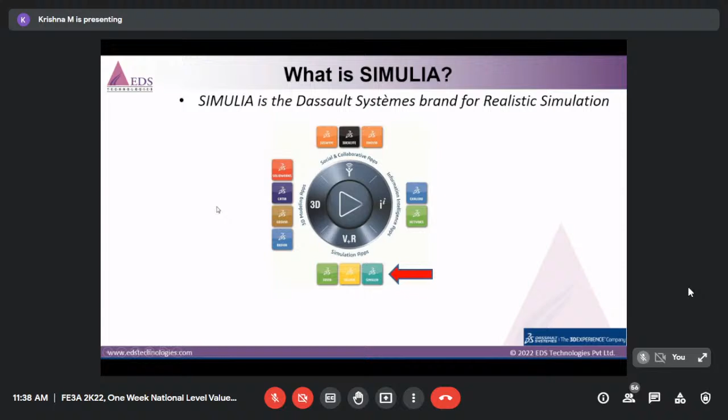So here you can see what is realistic simulation, right? If you can see, what is realistic simulation? What do you mean by realistic simulation? Okay, realistic simulation is a simulation that helps be physical, realistic, and lifelike in every way. So what does that mean?

So how can I improve my - what is realistic simulation? Tell me.

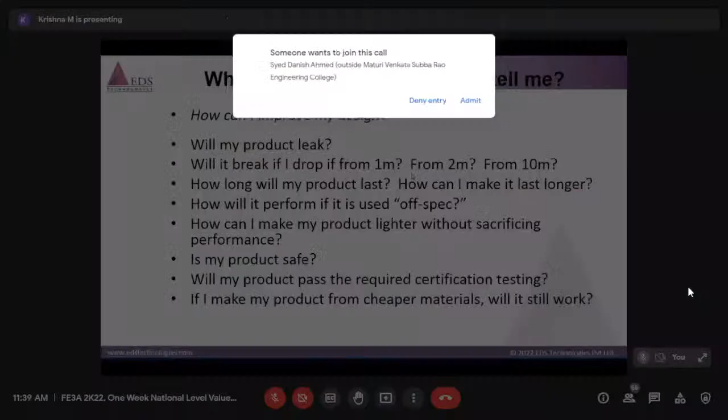Simulation helps you improve product design and development. It can be used at various stages, not only during product development but even after. For most OEMs, issues can arise after delivering the product, like breakage of parts that need to be quickly rectified, and at that stage you cannot go to the lab and keep testing. You need a solution faster.

For that process, you can use ABAQUS or similar finite element packages. You can't just go and do prototyping at each and every part in the design process, as it would take a long time. To reduce the time, you use a simulation technique, a simulation product.

You can do various analyses, like a drop test, for industrial products ranging from washing machines to mobile phones. These products undergo various testing before release into the market, but most companies no longer do all the tests physically. Instead, these are done using simulations, doing finite element analysis to reduce the time.

If you do physical prototyping and testing for everything, it takes a lot of cost, and you have to do multiple testings. The cost and the amount of time required both increase. To reduce this timing, we use realistic simulation.

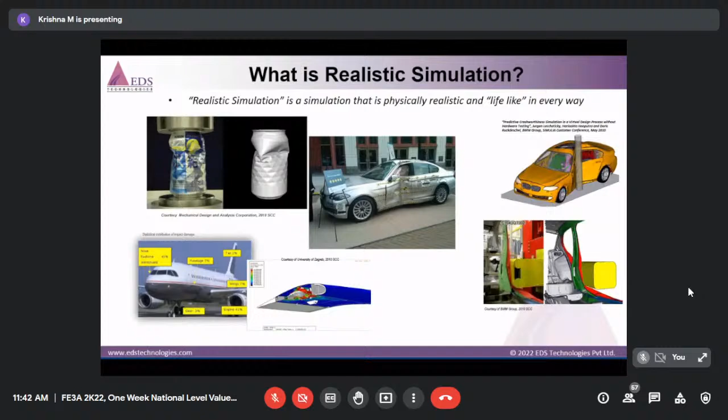Our product portfolio addresses the need for this, covering product development across the life cycle, from concept to detailed design, and realistic simulation of complex physics.

What industries use realistic simulations? All of them, starting from automotive engineering. In automotive, it's used for safety design, NVH, durability, powertrain, chassis, suspension, tires, and handling. In aerospace, it's used for composite analysis, thermal fluid analysis, and impact analysis.

In the ship industry, it's used for structure analysis, stiffness, wave slam, and blast analysis. In heavy machinery like excavators and tractors, durability testing of these products and various turbines can all be done with simulation.

Even for everyday products like smartphones and telecom equipment, electromagnetic analysis is done to see antenna coverage, where CST simulations can be done using SIMULIA products.

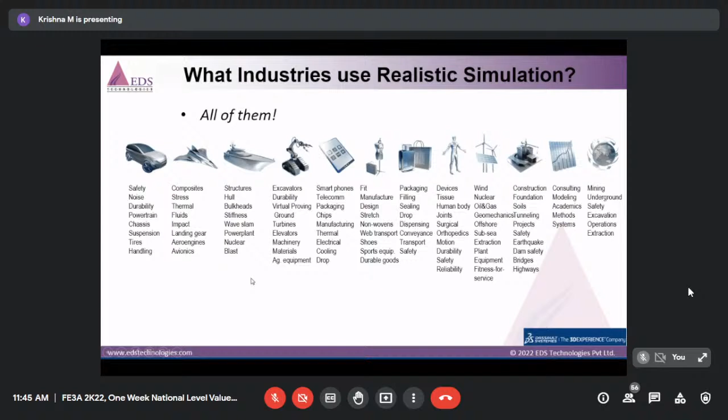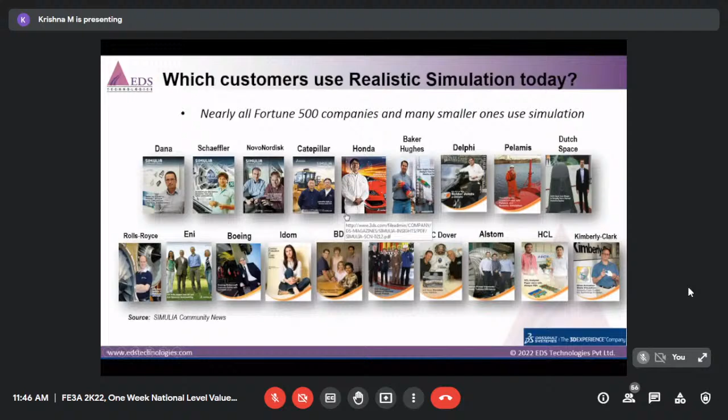So there are two aspects in this product supplied by SIMULIA: one is for commercial and one is for academic. For commercial purpose, it is completely useful starting from the design stage, where designers can use CAD, your products and PLM services to design the product, then a design engineer can perform simulations, and researchers can use it with full-fledged node count.

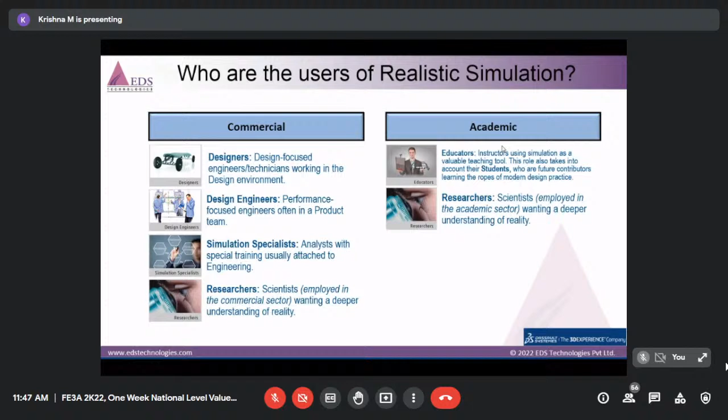SIMULIA has a very powerful portfolio. It comes with ABAQUS, Isight, TOSCA, and fe-safe. So it's a complete package: SIMULIA ABAQUS.

It is a virtual prototyping solution based on implicit and explicit finite element analysis and simulation technology. The solvers are commonly used to develop competitive products at low cost, to simulate real world linear and non-linear applications. These can also be found in various industries like life sciences, consumer products, electronics, and all other industries.

If you go to SIMULIA, Isight expands the benefits of simulation by incorporating process flow modeling and optimization into product development.

Isight is a solver agnostic tool and can integrate with existing in-house programs like third-party solutions—for example, if you have CAD programming, that can be integrated into this. The benefit of Isight is simulation automation and the process of integration and design optimization.

If you come to TOSCA, it's a non-parametric design optimization technique used for development. For example, if you have a product and want to reduce the weight, you can see what design results from reducing the weight—you can take a blank and use TOSCA with given parameters.

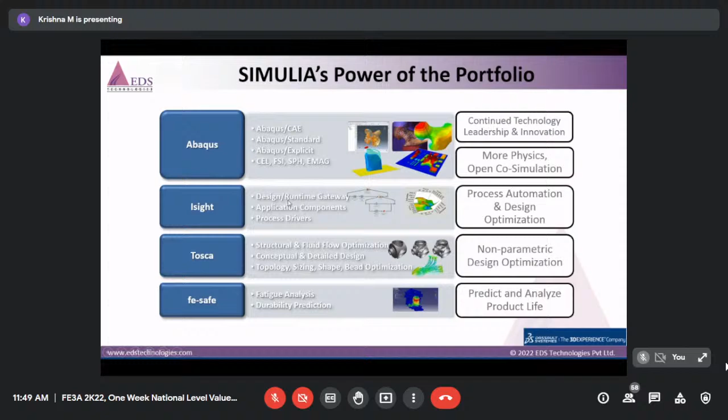So this is an overview of the SIMULIA portfolio products, and let's start with ABAQUS.

ABAQUS is a leading technology for finite element analysis. It's software used across all industries, and it's the most powerful, complete solution for engineering problems. It can do linear and non-linear problems, implicit and explicit dynamic analysis, and crash analysis. It is very robust in contact analysis, because the core software started with contact analysis, and it's also robust with fracture.

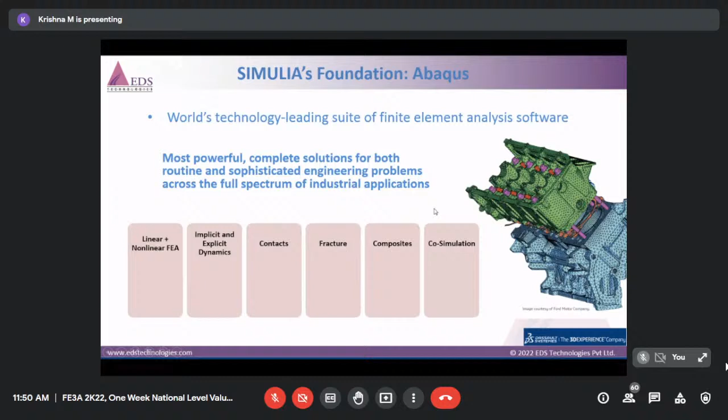What do you mean by fracture? You can do fracture analysis and crack propagation using ABAQUS, and composite simulations can be done for various products you're working on, as well as co-simulation—so linear and both implicit and explicit can be done together.

So here you can see it's a tool for all—one tool with all the analyses in it.

From the designing stage, small designers can start with linear analysis here. You can see snap-fit analysis going on in these two fronts, and drop analysis can be done. You can do slosh analysis using CEL elements, and also tire analysis, showing how the tire performs under various soil and weather conditions.

These simulations can be done, and energy dissipation can be seen here, and also we can do crash analysis. So ABAQUS simulations can do very basic linear to highly advanced non-linear multi-large assembly simulations. It's a tool that fits everybody's need.

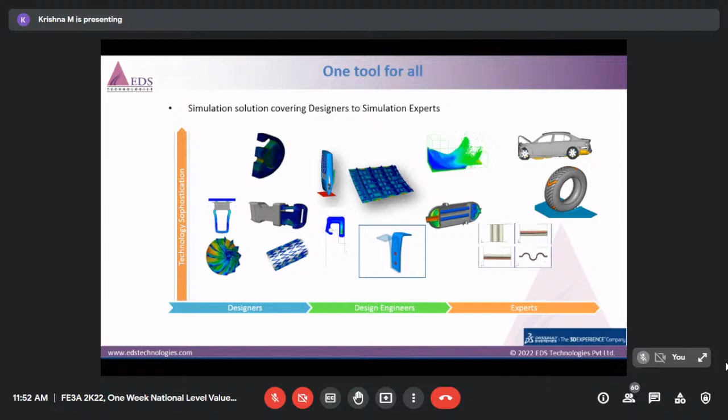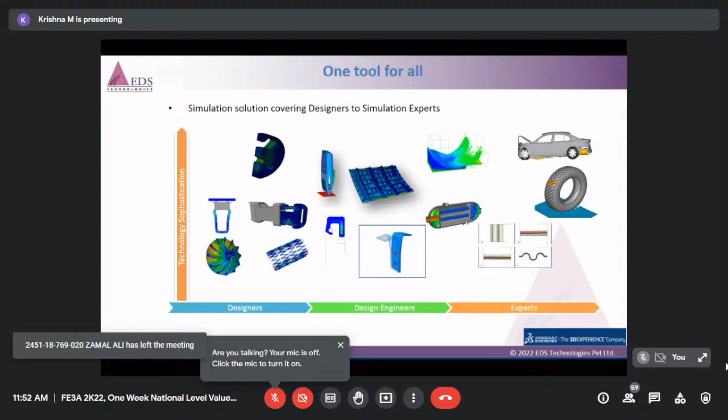You can see what everybody does. They start with a simple model and increase the complexity, the model size, and the physics as it grows, gaining confidence in the simulation results and increasing their expertise, to find the valid simulation.

So how does it all fit together? It's also associated with other software, like other interfaces such as CAD interfaces. It has dedicated interfaces, like SolidWorks if you're doing a part in SolidWorks. SolidWorks associative interfaces are there dedicated, so third party CAD services can be included.

So what does the associative interface do? If you model the product using a CAD software and that has been imported into ABAQUS, with this software interface, after doing analysis you can make small changes in the part, like a small component. If you want to decrease the thickness in the component, those changes in ABAQUS will be automatically integrated into the CAD software.

Similarly, after getting the results, if you're not doing the CAD yourself, you give the details to the CAD engineer. He does the changes instead of importing the model again, and these changes done on the CAD will be directly integrated into the ABAQUS solution.

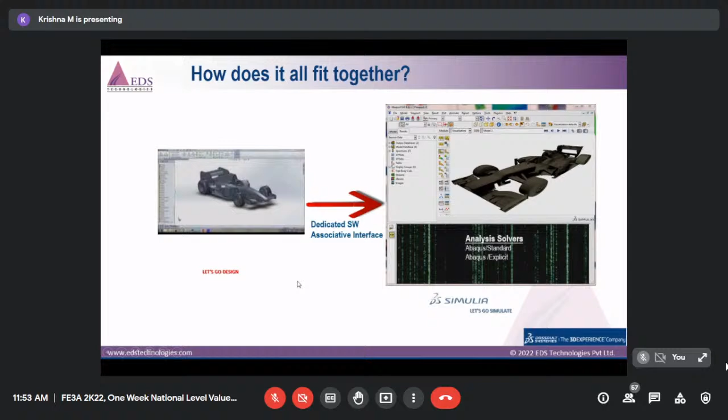As I said before, ABAQUS has solutions for an entire range of industries - consumer packaged goods, plastic and glass forming, and automotive. This includes chassis analysis, bending and torsion analysis, body and tire analysis, interiors like IP boards, crash test analysis on BIW and brake systems, and thermal analysis on powertrain.

If you go to industrial equipment, you can do non-linear analysis, thermal analysis, high cyclic loading, and for life sciences, tissue modeling. As I said before, you can also do analysis on stents.

In high-tech industry, you can do thermal cyclic analysis on solder joints. Because the parts are very small, you can do vibration analysis, drop tests on them, semiconductors, circuit board analysis, and analysis on antennas, how far the range of the antenna is going.

In aerospace and defense, you can do fluid analysis, landing gear analysis, and for structures, thermal analysis, natural frequency analysis, and modal analysis. You can see if the structure would fail in a fire, and you can do concrete analysis. These are the various analyses that can be done using ABAQUS.

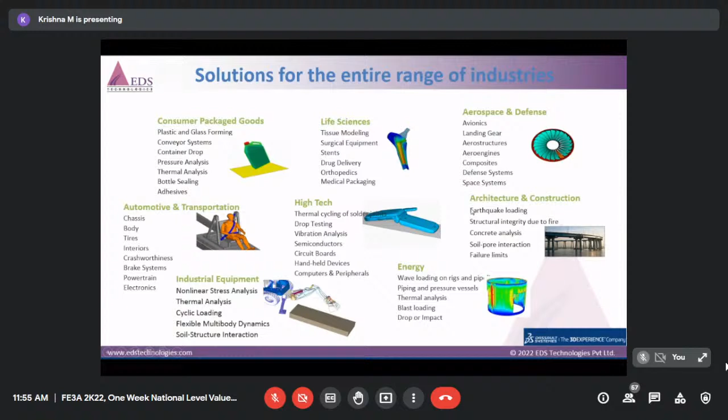Now let's go forward. ABAQUS CAE - what is ABAQUS?

Today, product simulation is often performed by engineering groups using niche simulation tools from different vendors to simulate various design attributes. The use of multiple vendor software products creates inefficiencies and increases costs. So Simulia develops a scalable suite of unified analysis products that allows users, regardless of their simulation expertise or domain focus, to collaborate and seamlessly share simulation data and approved methods without loss of information fidelity.

The ABAQUS Unified FEA product suite offers a more powerful and complete solution for both routine and sophisticated engineering problems, covering a vast spectrum of industrial applications. Like in the automotive industry, engineering working groups are able to consider full vehicle loads and dynamic vibrations, and perform multi-body simulations, impact and crash analysis.

You can do nonlinear static analysis, thermocoupling analysis, acoustic-structural coupling analysis, using a common model database structure and integrated software technology. ABAQUS best-in-class companies are taking advantage of this ABAQUS Unified FEA to consolidate processes, reduce the cost of the product, reduce inefficiencies, and gain a competitive advantage over competitors.

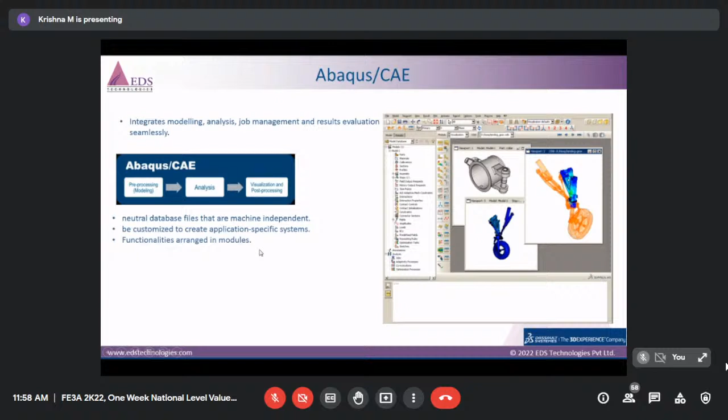So these are the various modules and workflow that we go through in ABAQUS CAE. We have the part module where you can create the parts, geometry and features. We can decrease or increase the radius of the circle, create parts, and change the geometry.

And then in the property definition, you have to define the property of the component, material definition, and define the section, and assign the section to the parts. And then we go to the assembly, where we position a part from its initial configuration and set up the parts.

And then we go to the steps, where you decide what kind of analysis you're going to do. You initialize the step by specifying the kind of analysis, like static analysis. You can do all that in the step.

And then going to interaction, you can define the contacts and the constraints. Contact and constraints can be defined, like if you're doing a bonded contact or a sliding contact. All this can be defined in the interaction section.

And when we go to loads, here you can manage the loads, how to apply the loads and boundary conditions using the loads tab. And when we go to mesh, after creating loads and boundary conditions, ABAQUS automatically does the meshing for you.

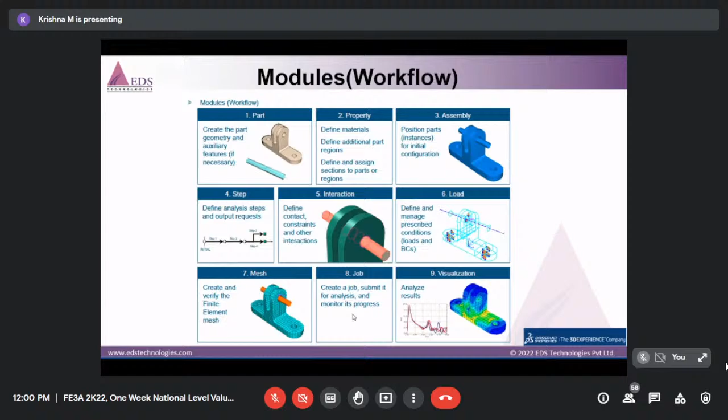And you can visualize the results after doing the analysis.

Am I audible to everybody? Is it clear what I'm showing, and can you see the pictures? Yeah, sure, sure.

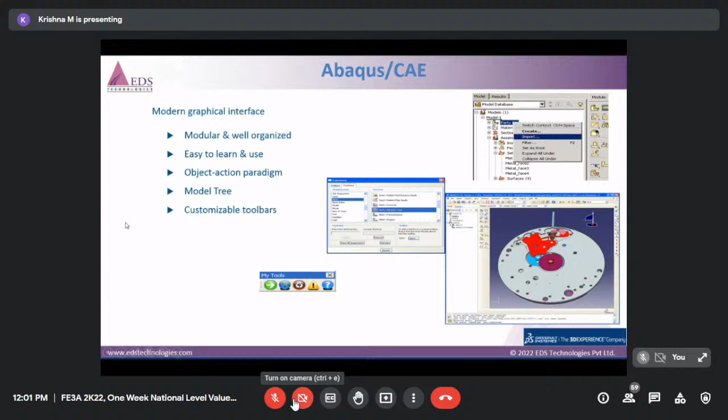So ABAQUS CAE has a very modern graphic user interface. It's modular and well organized, and easy to use. You can customize the model tree and the customizable toolbars in this interface.

So in geometry and model import, with ABAQUS you can not only create the geometry, you can also import CAD geometry as step files or IGS files from CAD softwares.

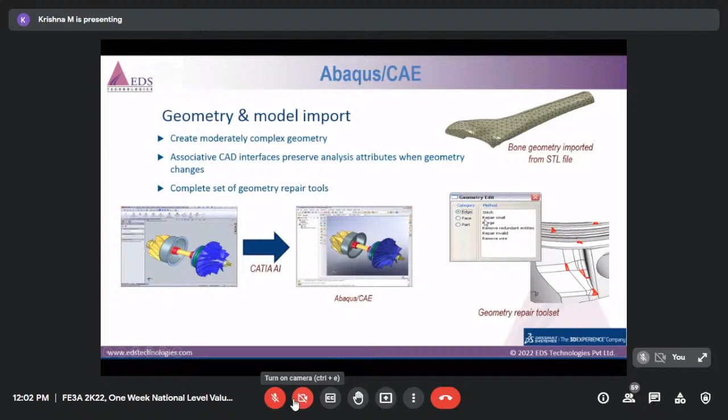And after importing the files, you can see if there is small hatching and do small geometry repairs, because when importing small IGS files, there could be glitches or some changes in the fillet areas that you can fix using the geometry model.

So before even going into how to start ABAQUS, there are three ways of opening it. One is through the command line, and this we will see while going through the workshop. Just to give a brief introduction, I'm going through these slides. So there are three ways of opening ABAQUS.

You can open it from the command line, from the start menu, or from the working directory. From the command line you can open ABAQUS, or go to the start menu where you can see the ABAQUS file and open it directly. You can also go to the working directory and double click on the CAE file, and it will directly open ABAQUS for you.

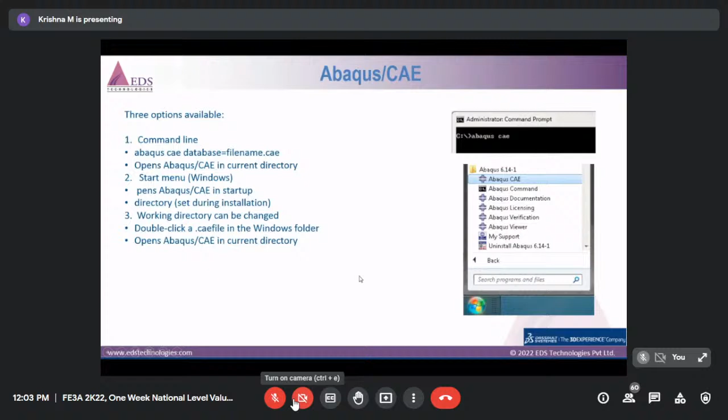Once you see how to open the file, then you can see how the geometry can be modified or imported. ABAQUS is also very robust in doing the meshing, so it doesn't require any pre-processing. You can also import a mesh directly if you write it as an INP file and import it.

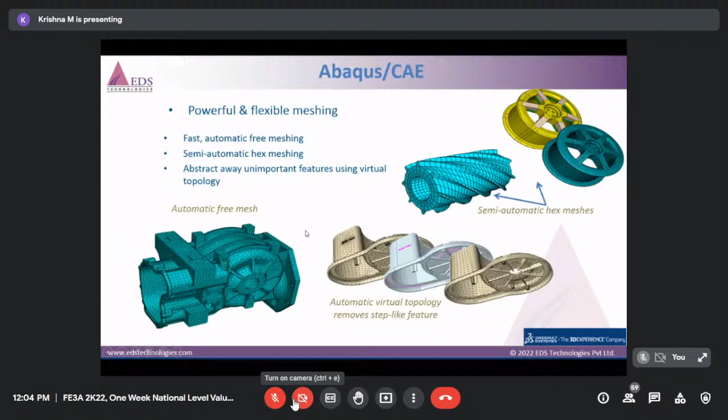ABAQUS has a robust meshing process. If the components are small, you can do hex mesh on them. And if your components are complex, like engine mounting, engines and casting components, you can do tet mesh, second order tetra mesh. And you can extract even from the mesh, so semi-automatic hex meshes can be done through that.

It also has a very powerful visualization tool. After doing an analysis, you can visualize large models in that. You can see the displacements, how the product is, cut the product and see at each section how it's behaving, or by probing you can check the data at a single point. Using plots, you can create XY plots, like over time how the stress is varying. This can be done using the ABAQUS visualization tool.

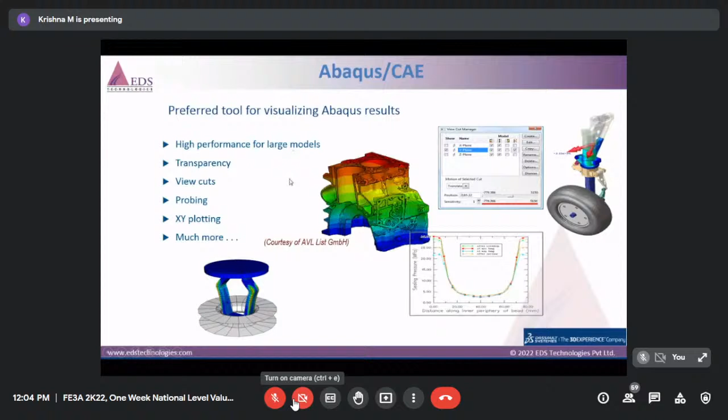So that was a brief introduction of ABAQUS CAE. While doing the workshop in the second half, we will be looking at it and doing the workshop. I'll open ABAQUS, and you can work along with me.

ABAQUS has, as we spoke, analysis products. ABAQUS has two things: ABAQUS Standard and ABAQUS Explicit for doing the analysis.

ABAQUS Standard employs a technology ideal for static and low speed dynamic events, where highly accurate stress solutions are critically important. With this single solution, it is possible to analyze the model both in time and frequency domains. ABAQUS Standard is supported with the ABAQUS CAE modeling environment for all the common pre-processing and post-processing needs.

Here you can do a viscoelastic material like a rubber sealing, and you can do thermal coupling analysis like for brake analysis using thermocouple analysis. An example of a sealing pressure gasket joint you can see here, or you can do steady state rolling of a tire, and crack propagation of an airplane fuselage.

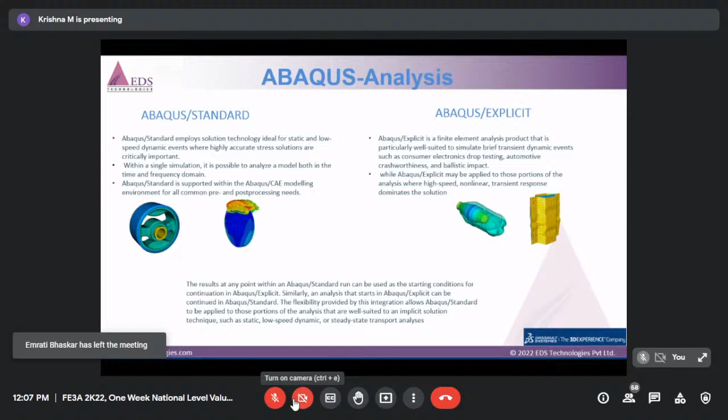With ABAQUS Standard, you can also do mechanical and acoustic response of pre-stress. Continuing the same example of the engine block, pre-stress of the engine can be induced and vibrations can be determined. These all can be done with ABAQUS Standard.

If you go to ABAQUS Explicit, it's also very robust, and it is particularly well suited to simulate brief transient dynamic events. Both analyses are time dependent, but with Standard we can do analysis where the load is applied over a very long time, and with Explicit we can do analysis where the time is very short, like drop analysis or crash analysis. These all come under explicit analysis.

There's one more thing: ABAQUS CAE supports results at any point, so an ABAQUS Standard run can be used into Explicit, and vice versa. After doing an explicit analysis, you can do a standard analysis on the same model. Results can be input more into ABAQUS Standard and do the analysis after that.

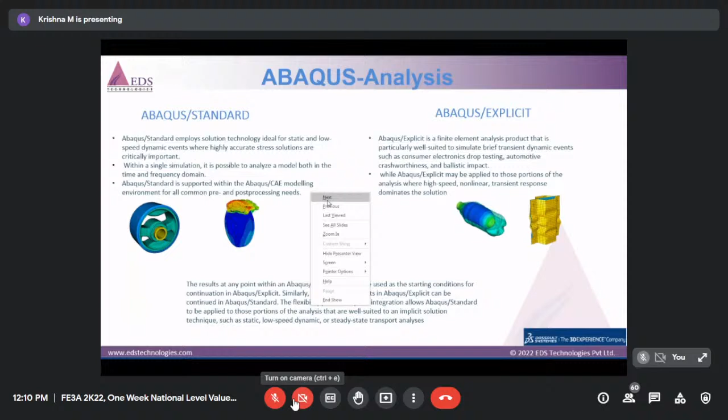ABAQUS standard is based on an implicit solution technique intended for static and structural dynamic events. It can do both linear and non-linear behavior. There are basically three types of non-linearity: geometric non-linearity, material non-linearity, and boundary condition non-linearity. All these three can be performed using ABAQUS standard.

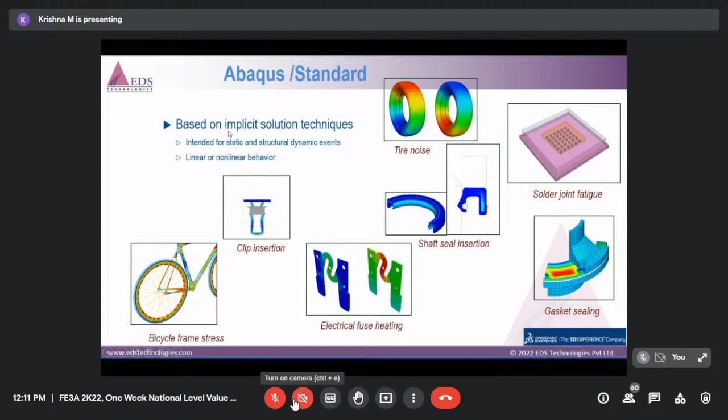So ABAQUS standard implicit solution can be used for static, structural, and dynamic events. And as I said before, ABAQUS explicit can be used - it's a time integration method, and it is intended for high-speed transient dynamic events.

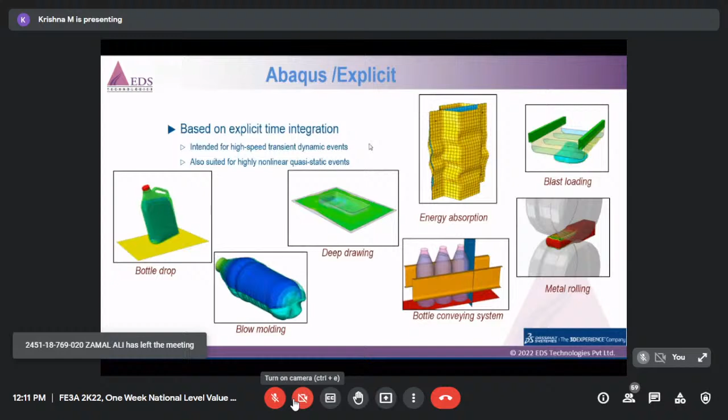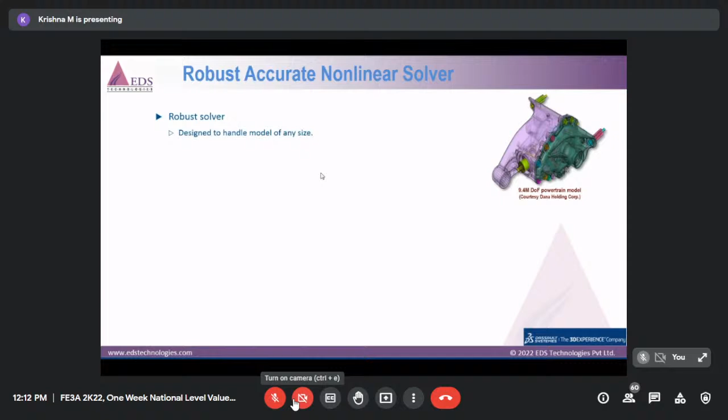ABAQUS is a very accurate nonlinear solver. It's designed to handle models of any size, starting from a 1D beam element up to a full assembly model where your node count is more than 13 million or so. It's a very fast solving process - you can use multiple processes at the same time and increase the speed. The algorithm helps you do the analysis very fast. It's very reliable and accurate.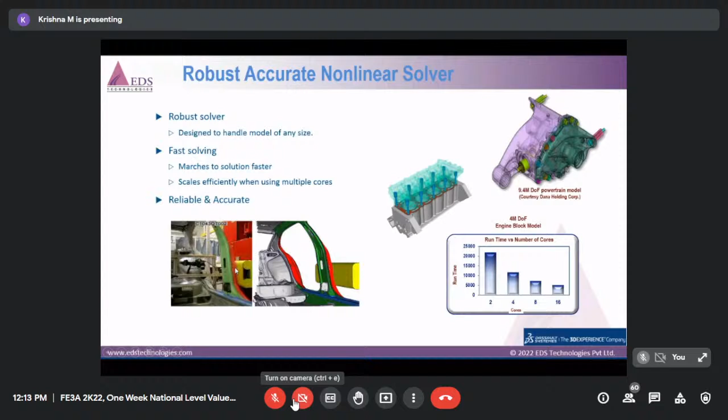What does it mean by accurate? It is very close to realistic simulation, as we've spoken before - all the results you're getting are close to real world simulation. As you can see here, this is courtesy of BMW - one of the pillars, called the B pillar, has been crushed and loaded from the side, and you can see that when it is breaking, it's breaking at the same time as the loading, in the same manner as what's been done in the lab. This is what we mean by reliable and accurate modeling.

And when it comes to contact, ABAQUS has been a long leader in FEA, and has very strong, sophisticated analysis capabilities. As I told you before, ABAQUS can do both linear and non-linear analysis on components and mechanisms. When it comes to contact analysis, it's very robust, extremely robust - can do various contact types, with a very high level of accuracy.

You can do the contact - there's general contact and self contact that can be done using the ABAQUS contact interface. It has a general contact capability. Like here you can see in this example, when this product has been folded, it comes into contact with itself - all this can be modeled using general contact.

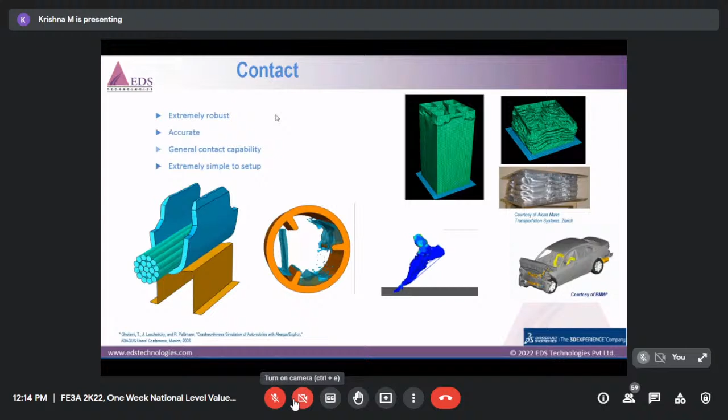And various contacts can be analyzed, like tank contacts, sliding, small sliding, finite sliding - all these can be performed using ABAQUS CAE.

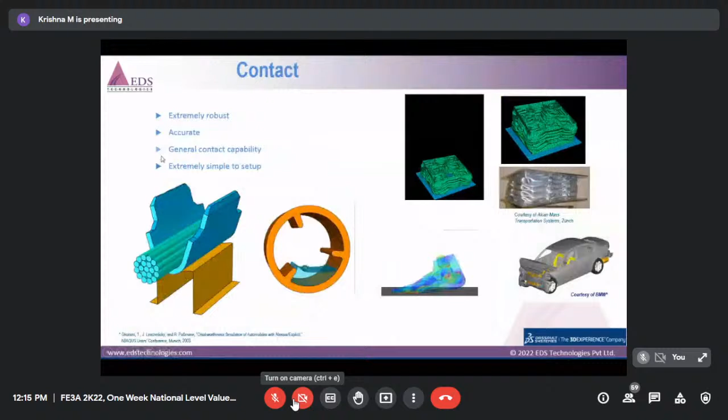So here you can see examples of how a human foot is touching and where it's getting in contact. Similarly, if you're doing tire analysis, you can analyze where the tire is getting in contact with the road. These analyses can be performed and these contacts can be created using ABAQUS contacts.

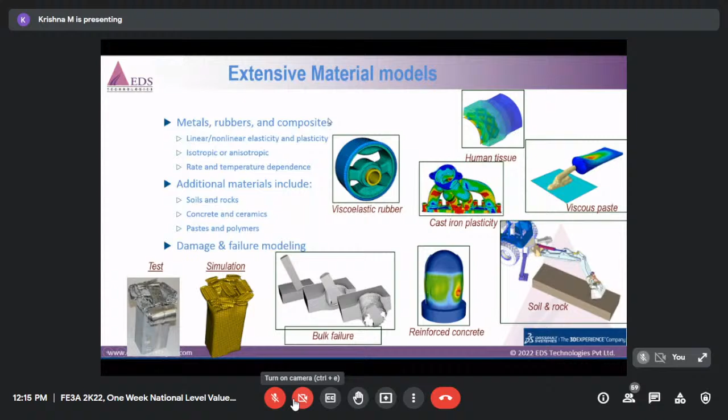ABAQUS does not have a material library as such, but it gives the feasibility to the customer to create their own material model. ABAQUS material models can include metals, rubbers, and composites. You can include linear properties, non-linear elastic and plasticity behavior. The material can be isotropic or anisotropic, and it can be temperature dependent. Even materials like soils, rocks, concrete and ceramics can be evaluated and used for analysis in ABAQUS CAE.

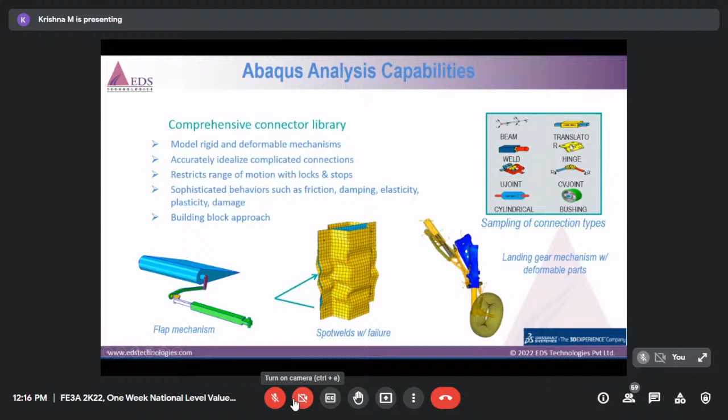ABAQUS also has various connector types to give different connections. For example, in the top right and bottom right, there's a shock absorber of a car. You don't have to model everything; you can simply use a shock connector for that and perform the analysis. Similarly, to do a flap mechanism, you can use various joints available, and like in a hinge model, if you're closing or opening a door, you can use hinge connectors. So it has very robust elements and connection types.

So, do you have any doubts or clarifications so far? Okay.

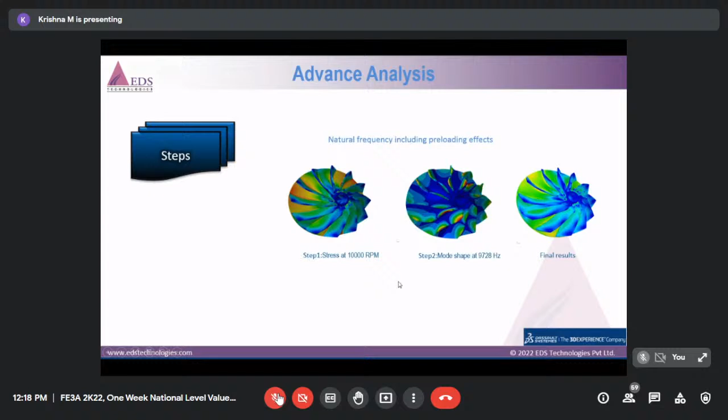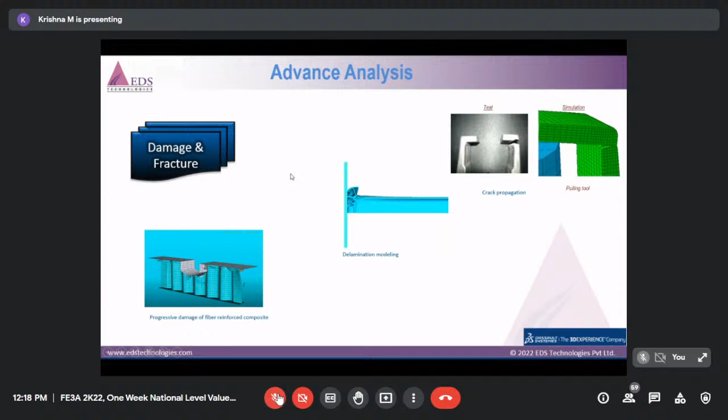You can also do multi-physics analysis, like thermal analysis, for example with a disc brake. At high speeds when braking, is the brake drum capable of handling that heat? These simulations can be done for road conditions, and they're highly used by Formula One cars. If you take the breakdown of a brake in a Formula car, it's very complicated, not simple. They use composite materials, and you have to do thermal analysis because it's at very high speeds. These simulations can be done with the multi-physics capability of ABAQUS.

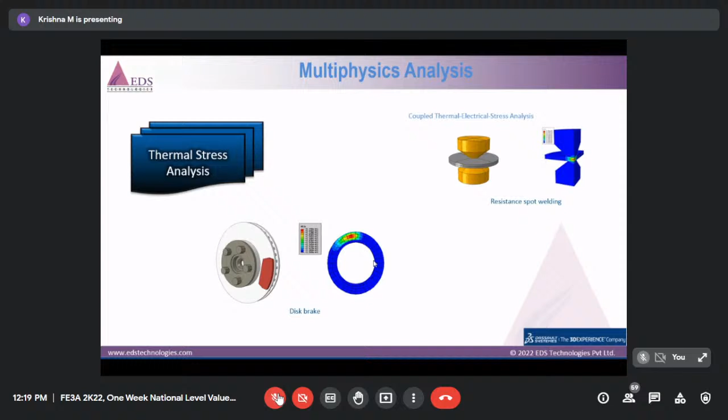So as a summary, this gives you an idea of what the ABAQUS product is. Hope you got a basic understanding of what ABAQUS CAE is and what kind of analysis can be done using an ABAQUS analysis product.

To give a summary, ABAQUS can be used for realistic simulation and is used by all industries. It can handle linear and non-linear behavior, sophisticated contacts and material modeling, and very large models. ABAQUS is not only for pre-processing; it can be used for post-processing and analysis as well. It is very useful, its GUI is very simple, and users can adapt to it very quickly. It can be integrated with CAD software, and you can customize the GUI as you want. So this is a great tool to have to do simulations.

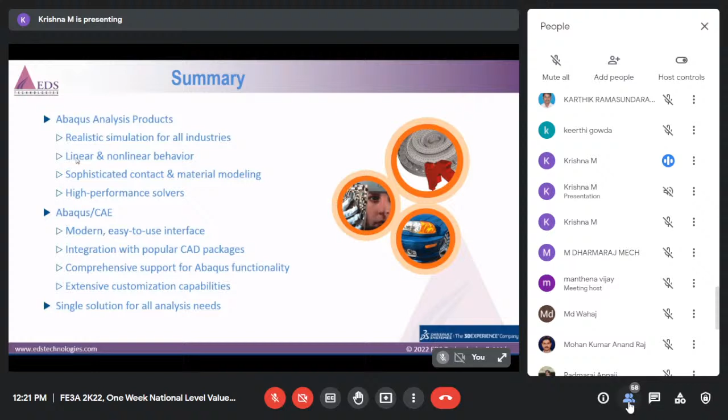Okay, so this was a basic introduction, and today's topic was going to be on static and dynamic analysis. Let's first understand in this next half an hour what is FEA, and what is static and dynamic analysis. So what is the difference between a static and a dynamic analysis?

Can anyone give me a small clue? I just wanted to get an input so we can see how deep we can go, just to get an idea of your frame of mind. If anybody can give me a small idea, what is static analysis? You could have guessed from whatever we've gone through so far, a small idea of what is static analysis and what is dynamic analysis.

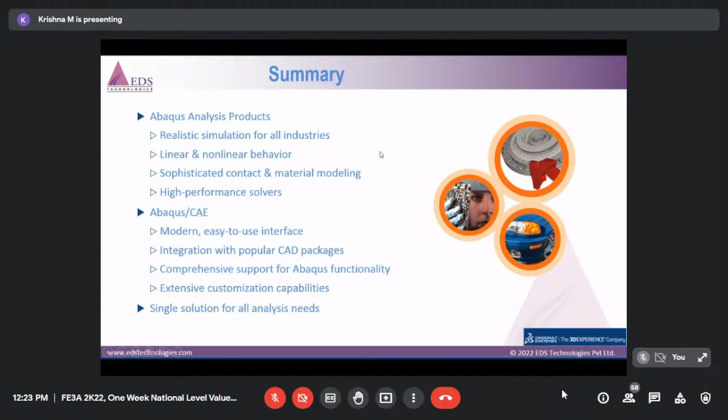Okay, let me start. Just give me a second.

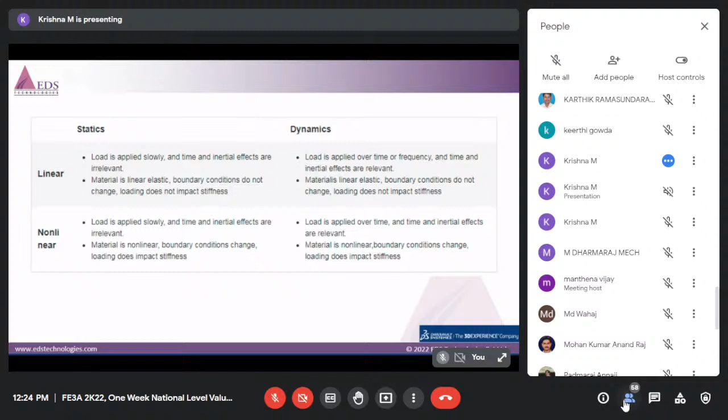That's starting with the same load and applying it at different intervals of time. Okay, so most people have this view that static is independent of time. Now, static analysis is not independent of time.

When you're doing static analysis, you're considering that the load and the time taken, the frequency at which the load is applied, is very small, or the time taken to apply the load is very large. These conditions are considered static analysis. When your load is applied over a very small time, the frequency is very high, and there are inertial effects from the loads you're applying, then you go to dynamic analysis.

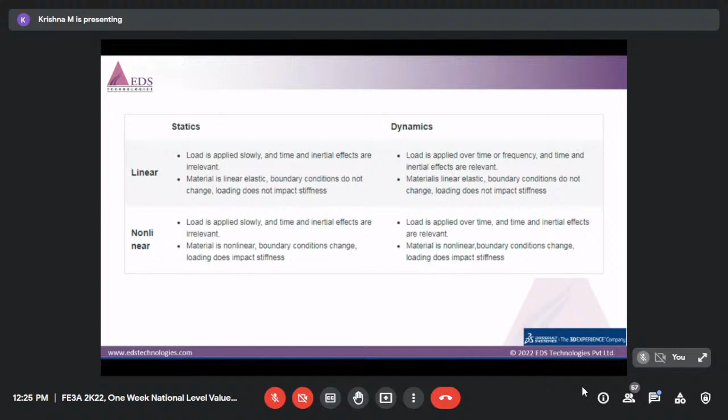Before we go any further, I would like to give you a small insight. I spoke so much about the software, Simulia, and the products that Simulia gives, the power of the portfolio we call it. What is the point of doing all these simulations?

This has to be discretized. What is the process, or what is the need for doing discretization? To understand that's what the finite element method is. We have a model, and this is a continuous part, right? So to do the analysis, we need to break it into smaller parts. This is done using the discretization method.

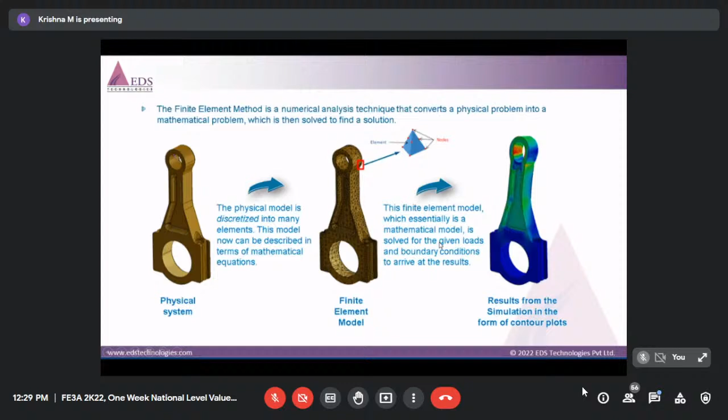Go to the previous slide. This is the point of doing a finite element analysis. Hope you're all having a bit of clarity about FEA.

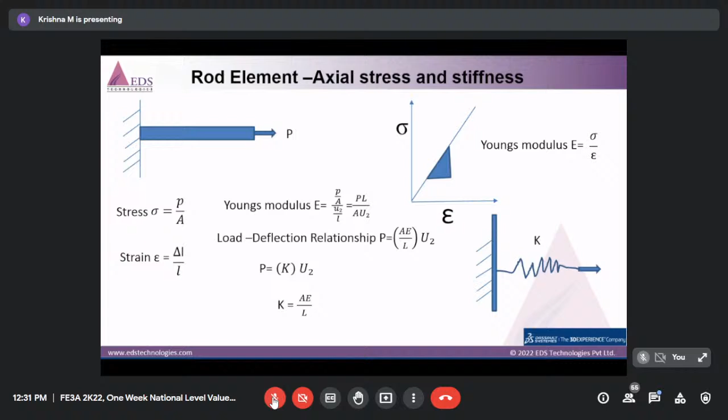So till now we spoke about simple static analysis and how it works. Just hold on a second. We spoke about static analysis and what is the need for doing analysis.

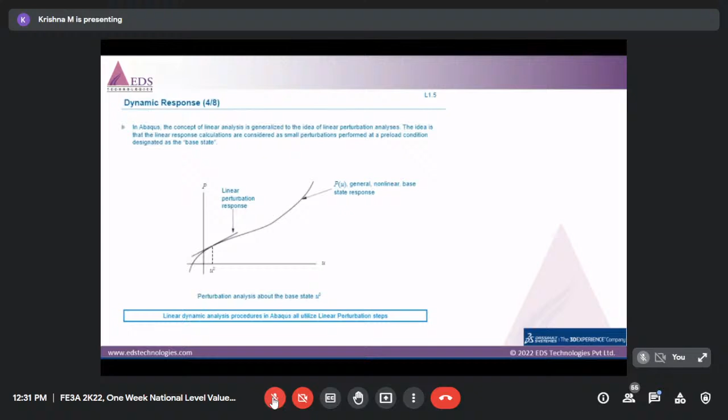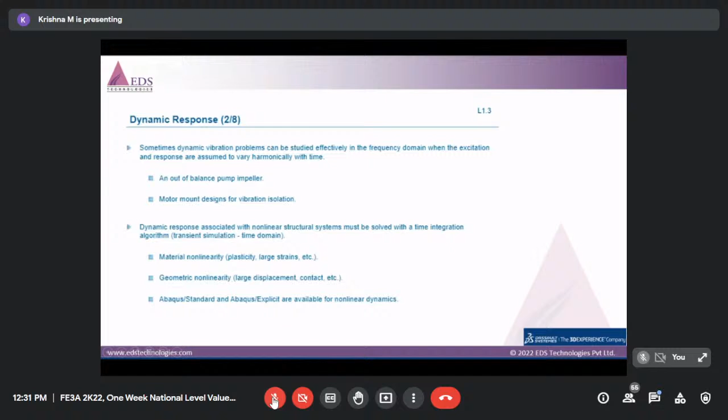So now let us come to what is dynamic analysis. When do we consider a problem to be dynamic? A problem is considered dynamic when, due to the force you apply, internal forces develop, there is internal resistance, inertial forces are generated, and there is structural acceleration. So when the force you applied involves inertial forces, structural masses, and acceleration, then you consider it a dynamic analysis.

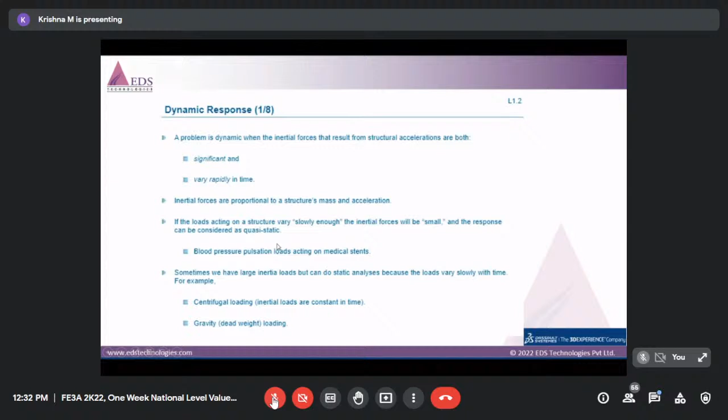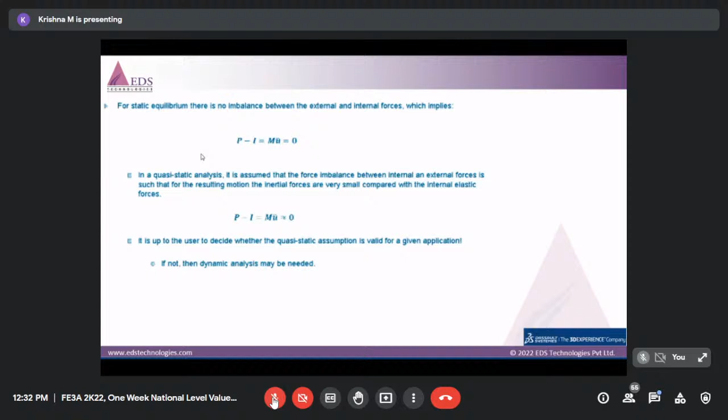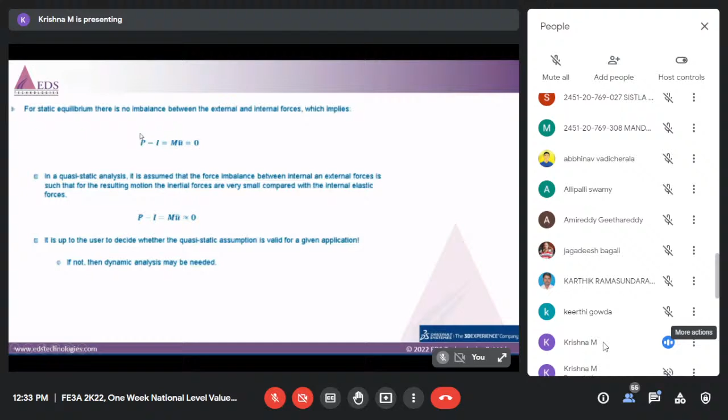For static equilibrium, there is no imbalance between the internal forces and the external forces applied. So if P is your load applied and I is your internal forces generated, you go P minus I. In the first equation, as I told you before, F equals K into D. Here it's the same form, and it equals zero.

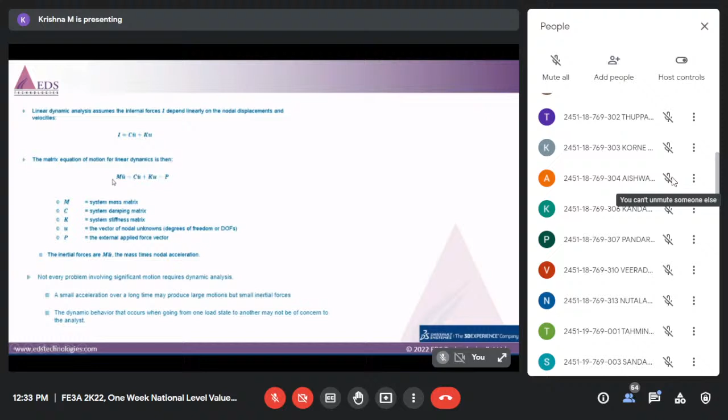But when coming to dynamic analysis, not only do we have to consider the inertial effects, but damping effects also come into picture. This is the linear dynamic analysis. This is a basic equation which you need to keep in mind for basic linear dynamic analysis. Let me go through the parts of the equation: the first is the mass system matrix, and then C here represents your damping.

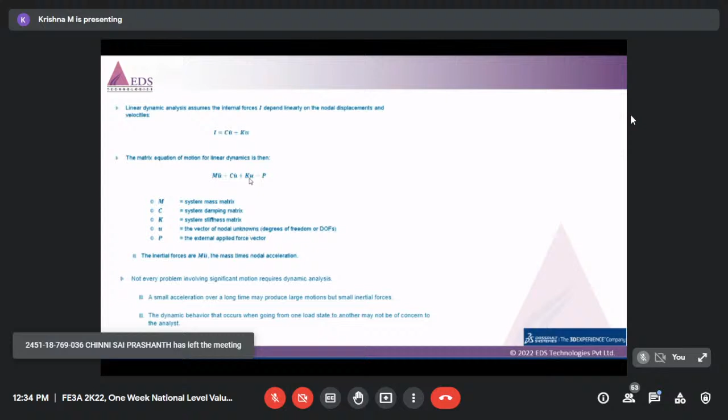What does damping mean? Whenever you're in a dynamic event, after application of the force, due to internal resistance there will be damping from the component. So you need to have that component. Then K is the system stiffness matrix that I've shown you before how to calculate. For a static problem it would be simple: P equals K into U. But in dynamic problems, because of the inertial effect, we need the mass matrix and the damping matrix to account for inertia.

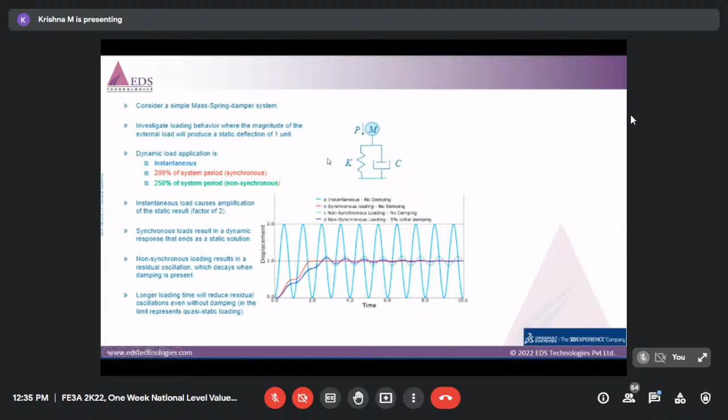But when the effect of damping comes into the picture and the load is applied very fast, then we have the participation of mass as well, and we consider it a dynamic problem. So dynamic solutions apply when the load is very instantaneous. For example, the spinning of a rotor is a transient dynamic effect because the rotor is getting accelerated from 0 to 10 seconds, and the RPM is increasing very fast. So can we consider this as a static analysis?

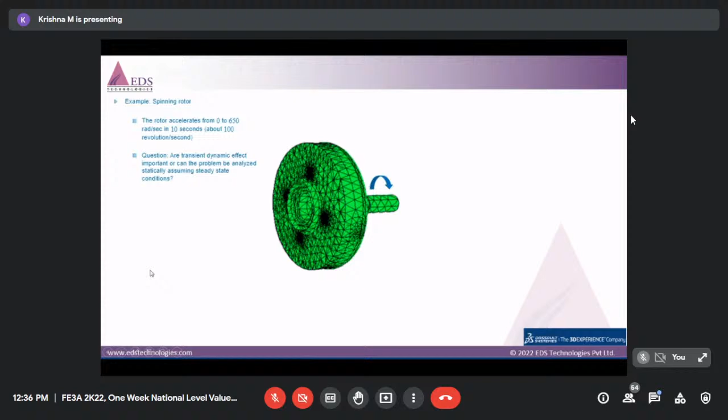Due to the stress induced from the initial rotation or acceleration, those can be considered as a first step, due to the centrifugal stresses from the rotor and the initial rotation speed. Those stresses can be considered as a static analysis, and the two can be combined after that. During the acceleration period, when the time is very small and the effect of the load is very high, that becomes a dynamic problem. So first we do a static analysis to get the loads, and then we do the dynamic analysis.

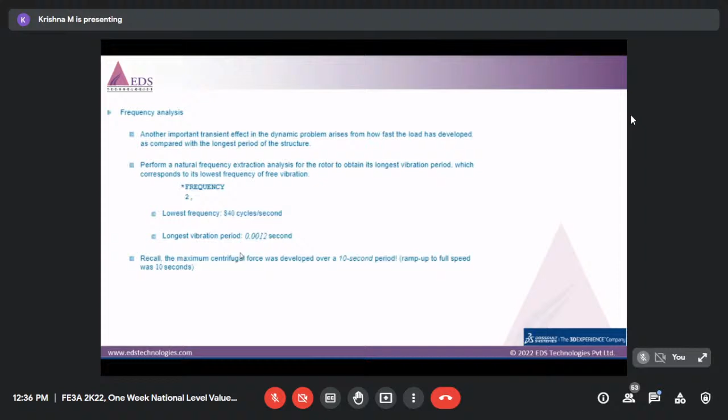So there are different types of dynamic analysis that can be done. You can have free vibration analysis with natural frequency, that is normal linear dynamic analysis, and if you consider non-linear, then you go to transient or forced vibration. Those come under non-linear dynamic analysis.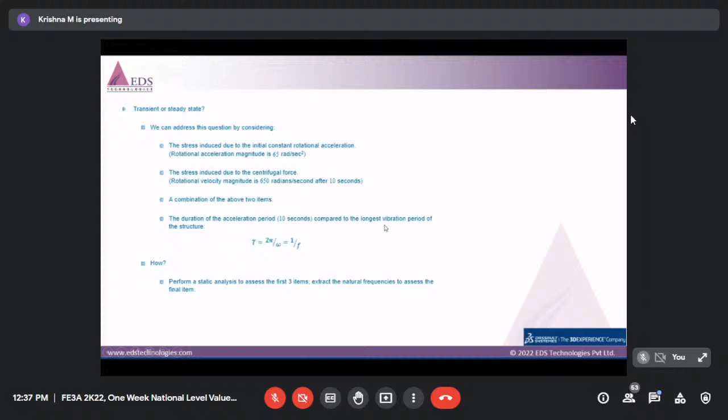Any questions so far? Understanding static and dynamic loading.

Hello. Sure. I'm sorry, just give me a second.

So I'm going to give one more brief introduction of ABAQUS FEA. As we spoke before, it has both pre-processing, where you can include modes like importing third-party CAD models, and it has a very robust analysis. You can do both standard and explicit analysis, and then it has a very good visualization post-processing.

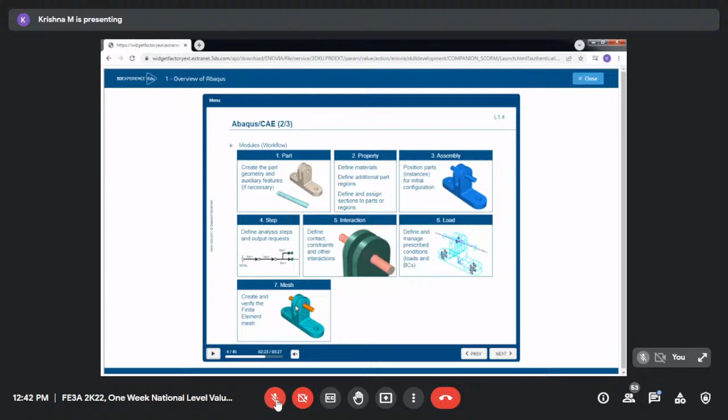We have a loads module where you can define loads and boundary conditions for the part, and then we have the meshing. As I told you before, ABAQUS CAE has very robust meshing inbuilt into it. So if it's a small part, you can see a very good hex mesh can be derived from that. And then you submit the job and do the analysis in the same ABAQUS CAE itself.

And then we have the visualization. Let's go to the different ways, as shown before, of opening ABAQUS. You can go to the command prompt and open ABAQUS CAE, or go to the start menu and open ABAQUS from there, drop down to Simulia products, and open ABAQUS CAE from there, or you can double click on the .cae file and open ABAQUS.

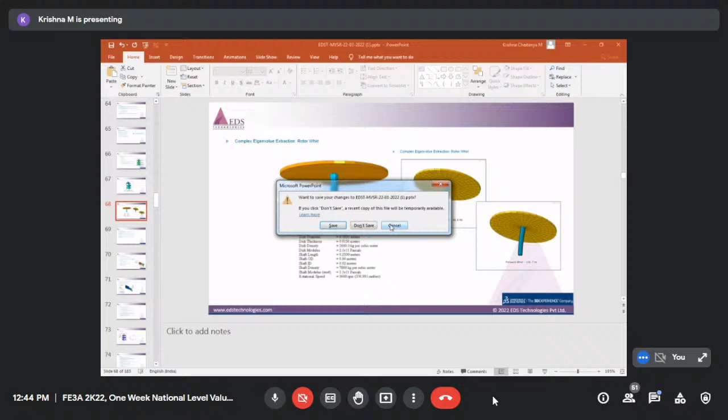Okay, sir. Sir, one doubt. Sir, is there an attendance for this class? Okay, sir. Okay, sir.